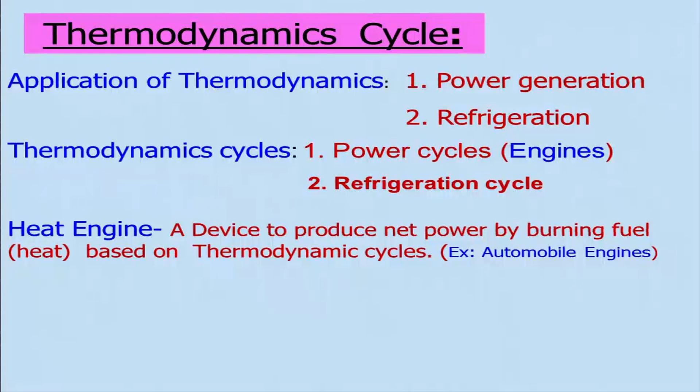Examples of these engines include automobile engines, gas turbine engines, rocket engines, and others. As I said, these are heat engines, devices to produce net power by burning fuels—it may be fossil fuel, nuclear, or similar kinds of fuels—and basically you generate heat, which acts as the driving input, and this is best operated on thermodynamic cycles.

This heat comes from combustion, that is the burning of fuel, and this combustion can be divided into two categories: one is the internal combustion engine, the other is the external combustion engine.

If you look at your automobile engine, is it an external combustion engine or internal combustion engine? Most of you might be riding your bike, which is powered by a heat engine, right? So what is that—internal combustion engine or external combustion?

What is the meaning of internal combustion engine? It is basically where the combustion, or burning of fuel, is an integral part of the engine—that's the internal part of it. In an external combustion engine, you can burn some fuel which is not an integral part of the engine, so we call that an external combustion engine.

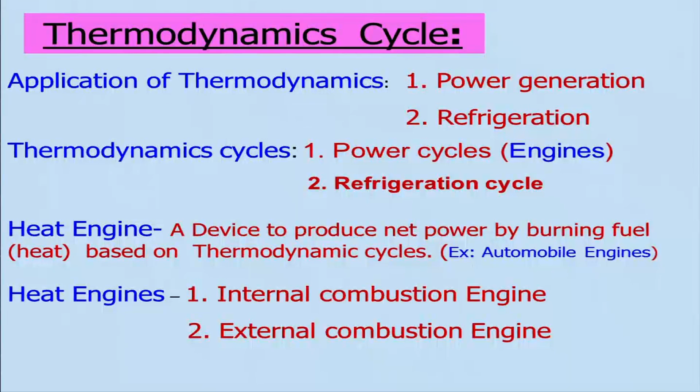If you look at the power cycle, which generates the power, it is not actually the cycle generating power, it is the system operating on the thermodynamic cycle that produces the power. Therefore, we label this cycle as a power cycle.

Power cycle can be broadly divided into two categories. One is the vapor power cycle. As the name indicates, vapor will be produced in the process - it is a liquid and then it will be converted into vapor, and again it will be converted into liquid through a condenser, and then you will get back the liquid.

In another cycle, or heat engine, there is no need to have a phase change process, like gas will be working, as in your automobile engine. We take the fuel, and of course the liquid fuel will be converted to gaseous form, but that is not the case here. You will basically be burning the fuel mixed with air, and working on that. We will be discussing the gas power cycle in detail.

Now, we will be discussing the vapor power cycle today. When you talk about this power cycle, it can be broadly categorized into two again, based on whether it is a closed cycle or an open cycle.

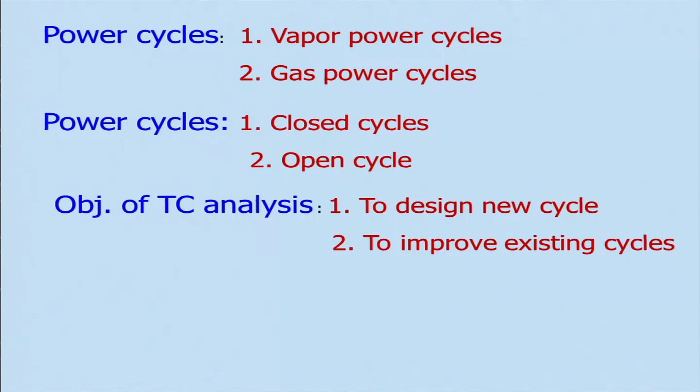Our objective is basically to analyze the thermodynamic cycle in twofold. One is to design a new cycle - suppose I am not happy with a cycle and want to improve it. Another is to improve existing cycles, because as we had seen in the last few lectures, we are interested in finding the second law efficiency to identify irreversibilities, so that we can pinpoint those things and minimize irreversibility to improve the efficiency of a system, engine, or refrigerator.

That will be helpful, and we will also gain some understanding. As I told you, the main interest in thermodynamic cycles is to determine the thermal efficiency, because that will tell you how good the cycle or the engine or refrigeration system is. We will always also need to look at other performance parameters, like the second law efficiency we saw in the last lecture, so we know to what extent we can achieve performance. Otherwise, you may think you want to achieve something, but it is not possible - so you should know the limit.

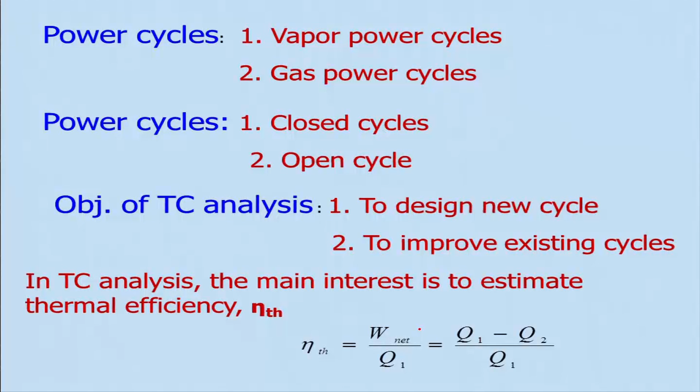Now we will be discussing vapor power cycles, and the steam power plant is operated based on that. Of course, we may think about what other fluids one can use. Steam power plants are being used profusely, not only in our country but in other places too. We depend on coal for generating power, and steam power plants are used - something around 70 to 75% of total power, maybe a little more. Earlier it was 90% of power generated by burning coal.

So there is a lot of scope for that, but what I was asking is a little different - is there any other fluid which can be used in vapor power cycles? Any idea? Of course, one has to look at the properties. Suppose except water, can we use some other fluid? What other fluids come into picture? Any idea? No idea.

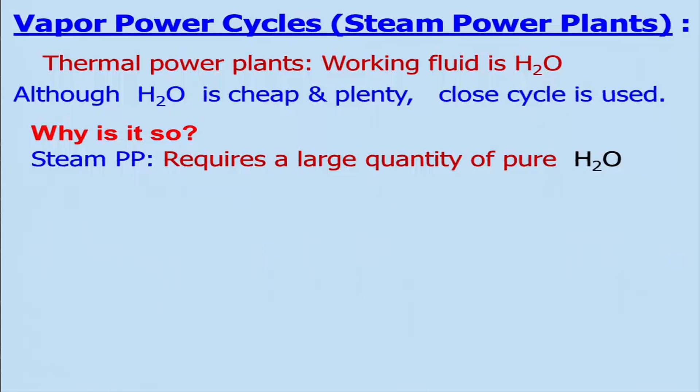But we do not do that because the steam power plant requires a large quantity of pure water. See, if you look at the water, you might be knowing that particularly the water in IIT Kanpur has a lot of solid content of minerals, right? If you boil it, you will see the scaling happening on your utensils. Did you notice that? In your room or something, you will find this.

So that scaling will be corroding the turbine blades, and it will be corroding the boilers and other components. So therefore, it is very difficult to maintain those components. And therefore, we need to use water which does not contain any solid particles or minerals which will dissolve in the water. So, therefore, that is the reason why a closed cycle is used in thermal power plants.

Otherwise, if I use purified water like that and just leave it, it will be a very costly affair. The water which will be used in this power plant will be quite pure in nature, so the cost will be very high.

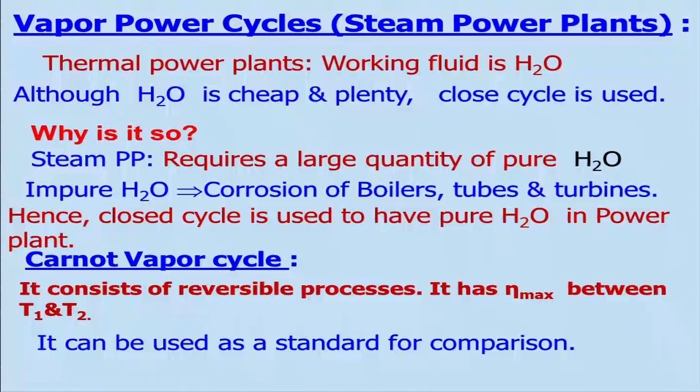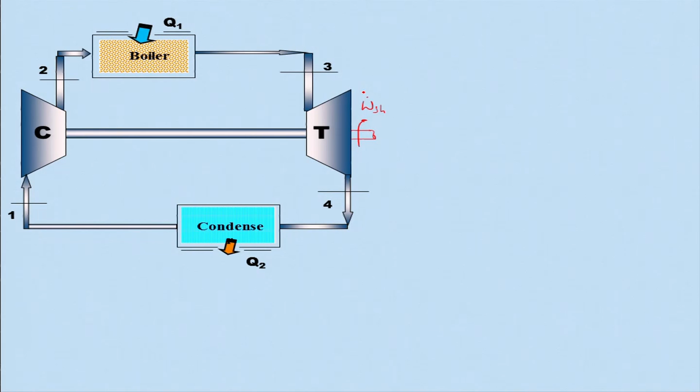Then in the condenser, when this fluid goes through it, it will be rejecting heat, let us say Q2 amount of heat, and then you will have to compress it such that it can go to the higher pressure, and then it will come back to that.

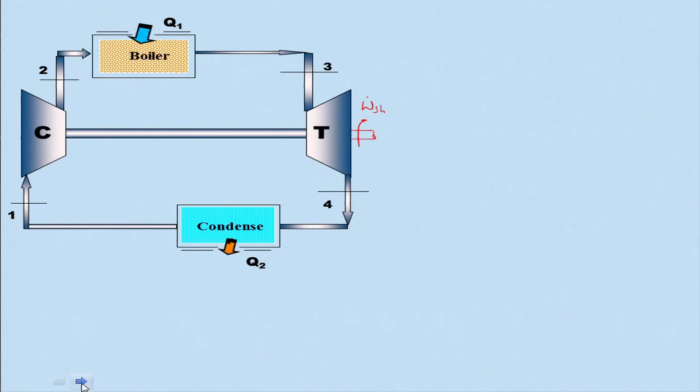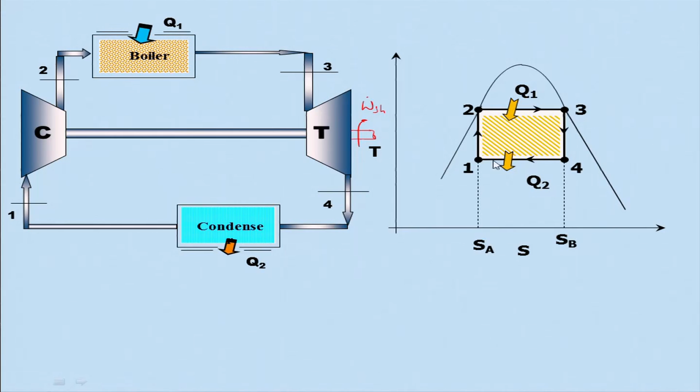So if you look at the processes: 2 to 3, a certain amount of heat is taken by the fluid from the boiler, and then it is expanded, ideally, from 3 to 4, where entropy remains constant isentropically. Then heat is rejected from 4 to 1, and 1 to 2 is your compression process. So this is the expansion process, which is isentropic, as entropy remains constant in this process. This is your compression, again isentropic. This is heat addition, 2 to 3, and heat rejection is 4 to 1, with temperature remaining constant - this is isothermal heat rejection, and heat addition is also isothermal in the Carnot cycle.

Now, let's look at what problems we will face if we use the Carnot cycle. Of course, there will not be any problem for heat addition, because if the phase change process is taking place and you keep the pressure constant, the temperature automatically will be constant. Similarly, heat rejection will not have much problem keeping the temperature constant in a practical sense, as the two phase flow is occurring.

But if you look at what the quality of the steam will be at state 4, is it quality 1, or 0, or in between? It will be in between, because of two phase flow. And for expanding the steam in a two phase flow, it is very difficult, and also it may erode the blades because two phase flow is difficult to handle.

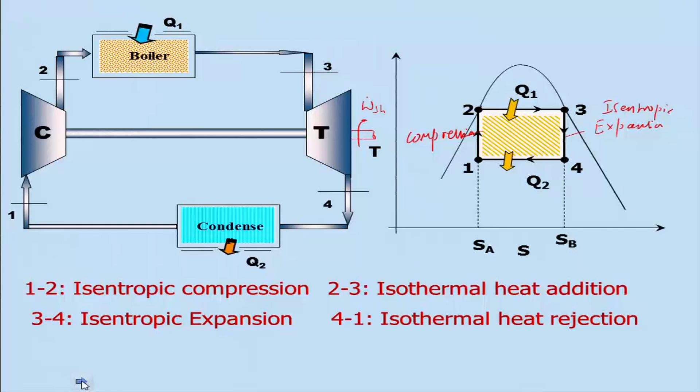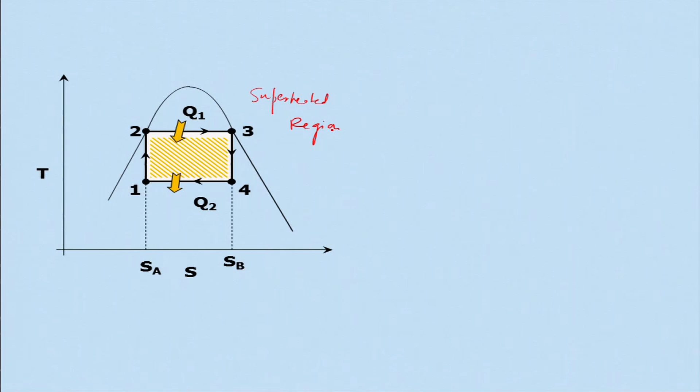Similarly, there is a problem with compression also. So, to overcome these problems, one can think of solving them. How can we solve it? We can think of managing this compression to occur in the superheated region. This is your superheated region, and then this portion is your compressed liquid.

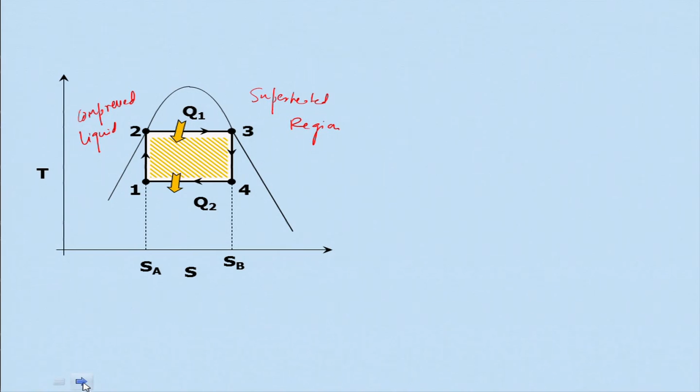So if you do that, then you are handling single phase fluid, and the problem may be solved. We can add heat here from 2 to 3 and then expand from this superheated region till the saturated vapor region, 3 to 4. And of course, 4 to 1 there is no problem, because heat rejection occurs there. It is liquid at state 1, and then you can compress the liquid very easily, single phase fluid. So that problem can be solved.

But here it is very difficult to control, for example, in the condenser when heat is being rejected between station 4 and 1, to what extent will it be rejected. I can happily reject to the saturated liquid condition, but it can stop anywhere in between. So then you cannot have control over compression to what extent, practically.

But in the modified version of this Carnot vapor cycle, you will also find a problem in the region between 2 to 3, because the pressure will not be remaining constant between state 2 to 3 in the modified Carnot cycle. This is your modified Carnot cycle.

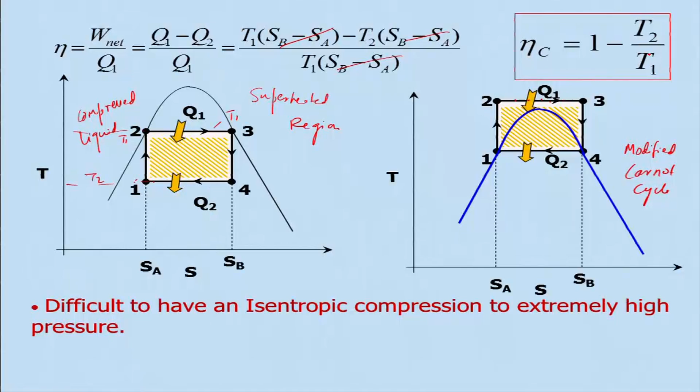We have seen that basically it is dependent on two temperatures, one is the sink temperature T2 and the other is the source temperature T1.

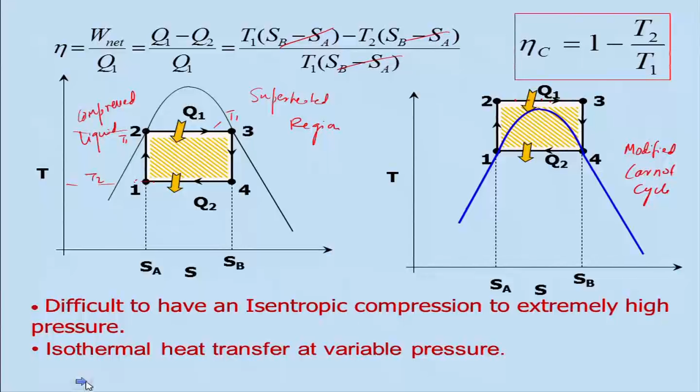So, what happened, can we solve this problem? What we will do is, instead of this compressor, we will basically replace it with a pump. Do you know the difference between a compressor and a pump? A pump generally handles liquid, like a water pump and other things.

The cycle is similar in nature: there is a boiler component, a turbine, a condenser, only instead of a compressor we are replacing with a pump. That indicates that in the condenser the liquid will come from the vapor to the saturated liquid point, meaning all the liquid, there is no vapor as such.

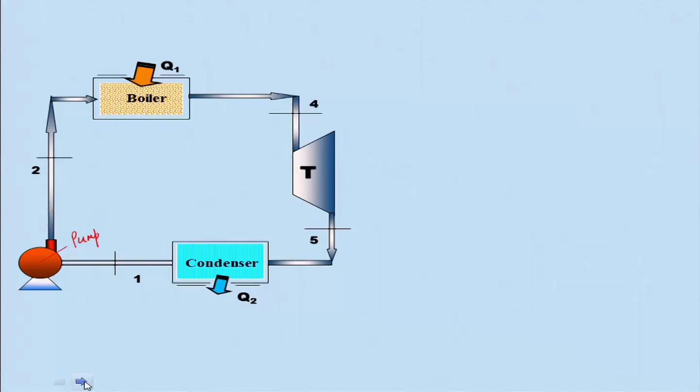This cycle is basically modified by W.J. Rankine, and that is why you call this modified cycle the Rankine cycle. So, if you look at the process, what we are doing is retaining the same heat addition from 3 to 4, that is constant pressure and also isothermal heat addition. Temperature will be remaining constant.

It is being expanded in 4 to 5, that is isentropic expansion we are considering. This is the ideal one; in actuality it will be different. Then heat is rejected from 5 to 1 till it reaches saturated liquid, only liquid. That means X in this case, X1, will be 0, quality of the steam will be 0.

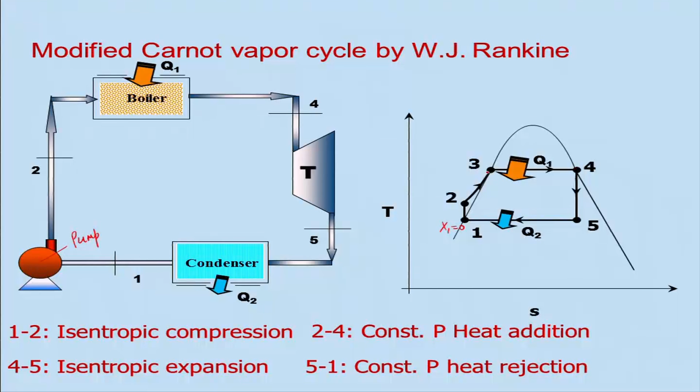It is only liquid, and then 1 to 2 is nothing but pump work. Then of course heat addition is 2 to 3 - this will be sensible heating, and 3 to 4 will be constant pressure heat addition. So this cycle is known as the Rankine cycle, devised by him, and this is basically called the ideal Rankine cycle because the processes are isentropic.

In a real situation it will not be isentropic, both for the expansion between station 4 to 5 in the turbine and from station 1 to 2 in the pump. That is not possible in reality. Therefore, we are calling it an ideal Rankine cycle.

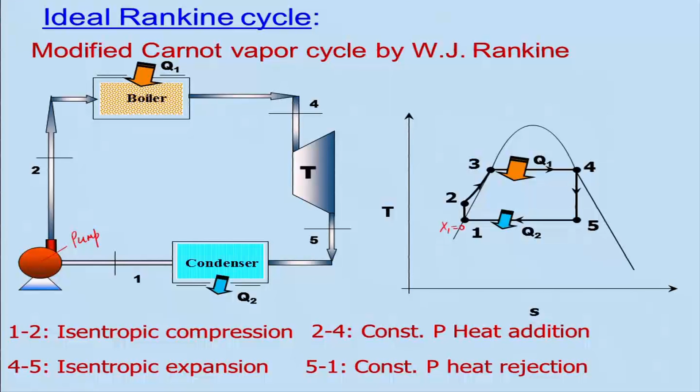Let us look at the problems we will be facing here. If you consider 4 to 5, X4 will be 1, where X is the quality of the steam, and X5 will be lower than that. If you look here, this is the saturated state where X will be 1, but here it is less than 1. That means if X is less than 1, more moisture will be there.

If more moisture is there, it will corrode the turbine blades. Generally, a quality of 0.9, or 10% moisture in the steam, is tolerable for a turbine, but more than that, a quality less than 0.9 is not advisable and generally not used.

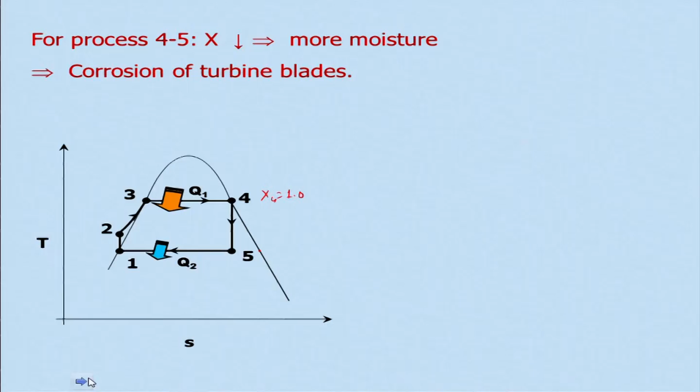So, to avoid this problem of higher moisture content, we can use superheated steam. How do we go about it? Instead of heating only up to here, I will heat it further and then expand it. That is what we will be doing.

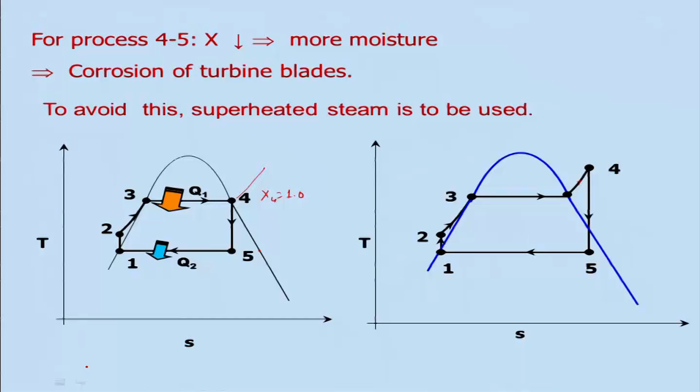So instead of stopping at saturated conditions, we superheat it to a higher temperature and then expand it, so that we get lower moisture content. This way we can overcome the problem by superheating the steam further. Therefore, what we get in modern boilers is a superheated boiler, meaning it can produce superheated steam, and this is known as the superheated Rankine cycle.

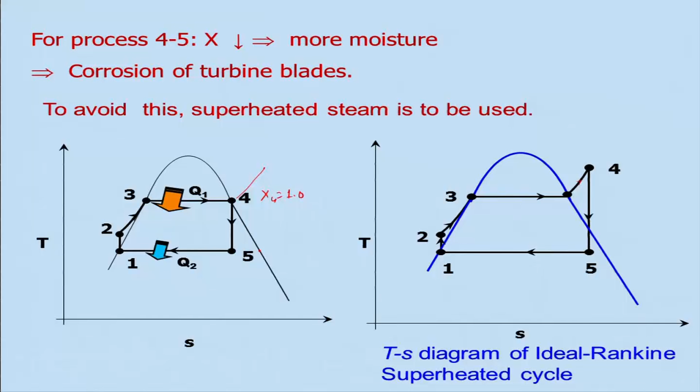And this is also an ideal process, because the processes in the turbine and the pump are isentropic, as we have considered. So we need to analyze this - we will learn how to analyze each component, and we will be applying the first law of thermodynamics to the boiler and condenser.

If you look at the boiler in this part, that is 2 to 4 is your boiler, yes or no? This is the heat added. So if you look at this, this is your Q in. So the Q in will be basically H4 minus H2, is it right?

So how have we arrived at this? We can consider the boiler as a control volume system. What assumptions are we making here? Steady state - we are making the assumption of steady state, and change in kinetic energy and potential energy is 0. There is no shaft work, shaft work is 0. So then we land in getting Q in is equal to H4 minus H2.

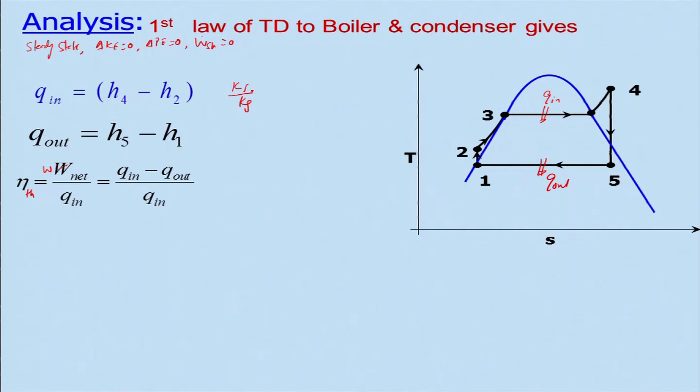And the thermal efficiency will be Q in minus Q out divided by Q in. And what is Q in? We have already seen H4 minus H2, and Q out is H5 minus H1, divided by H4 minus H2, that is your Q in.

And the net work done will be basically - the work done here is WT, and this work which is going out, you are supplying it, this is WP, pump work, and this is turbine. So H4 minus H5, that is the change in enthalpy, minus H2 minus H1, the change in enthalpy in the pump. That is the net work which the power plant will be producing.

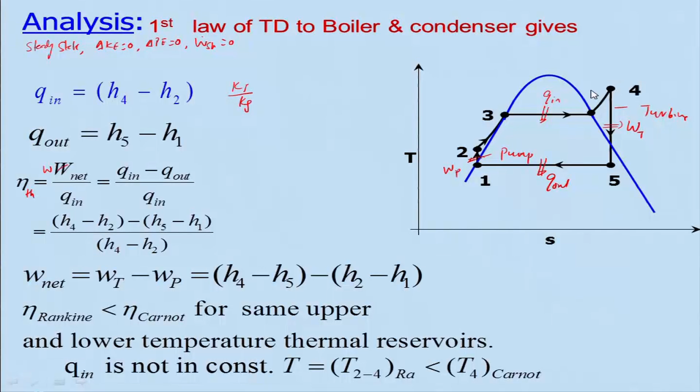And if you look at it, the Rankine cycle efficiency is less than the Carnot cycle efficiency for the same source and sink temperature. Why is it so? Because if you look at this temperature, T4 and T2, there are a lot of changes in the temperature, it is not remaining constant. Whereas the T4 will remain constant in case of your Carnot engine.

Are you getting it? So therefore, if I draw that, it will be something here, this region. If I look at the Carnot cycle, let me just draw it, maybe it will help you visualize. So that will be my Carnot cycle - it will be from here to there and then that. So therefore the temperature here, T4 for Carnot, and this you can consider as T1, temperature T1, for the Carnot. Therefore the efficiency of the Rankine cycle will be lower than the Carnot cycle.

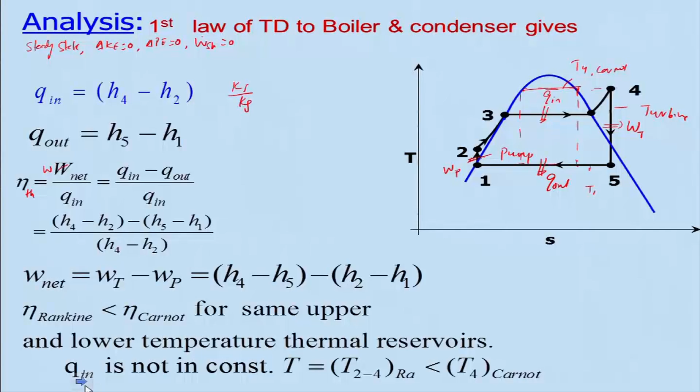So we will take an example to find out how we can work on that. This example is about a thermal power plant operated on an ideal Rankine cycle, with a steam mass flow rate of 10 kg per second. Water is fed to the boiler at 50 bar, which is quite a bit of pressure, and leaves the condenser as saturated liquid at 1 bar, 1 atmosphere pressure.

So, these are the cycles being used for this analysis. In the ideal case, 1 to 2 is the pump work, this is your pump, and 4 to 5 is your turbine expansion. This is your Q in and this is your Q out, so 2 to 4 is your boiler and 5 to 1-2 is your condenser.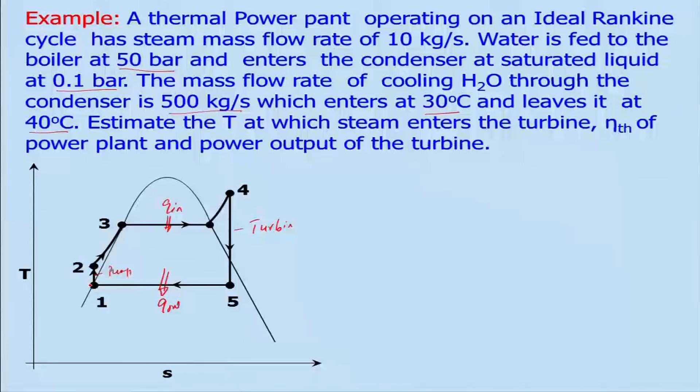So what are the things given? For the condenser, the cooling flow rate is 500 kg per second, and the mass flow rate of the steam or water in the closed cycle is 10 kg per second. We know that P2 equals P3 equals P4, because this is the constant pressure line at 50 bar, and P1 equals P5 equals 0.1 bar.

And the coolant inlet temperature is 30 degree Celsius and coolant exit temperature is 40 degree Celsius for the condenser. These two are for condenser.

So we will have to find out T4, and we will have to find out also the thermal efficiency and how much work is produced by the turbine. Efficiency is basically W net divided by Q in, and that equals H4 minus H5, this is your turbine work, minus H2 minus H1, that is your pump work, divided by the heat input to the boiler, that is H4 minus H2.

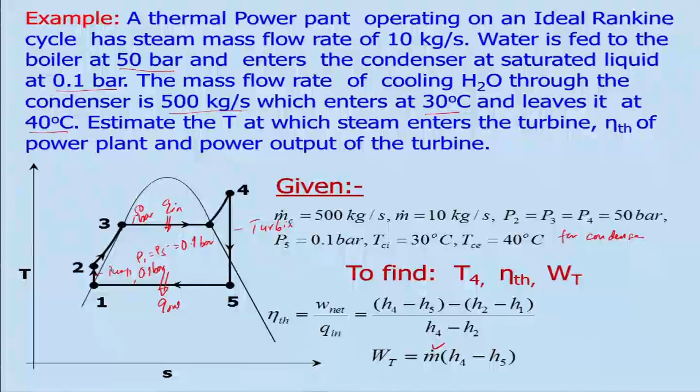I can find it, because we have given this temperature 30 degree Celsius and 40 degree Celsius, and from the steam table for water at 30 degree Celsius we can find that HF is 125 kilojoule per kg, and for water at 40 degree Celsius we get HF 167.45 kilojoule per kg from the saturated steam table.

And we have given that Q dot C, the coolant used for the condenser, is 500 kg per second, and multiplying by HF at 40 degree Celsius minus HF at 30 degree Celsius, I get this amount of heat, that is kilojoule per second. This is kilojoule per kg and this is kg per second, so I am getting this much power or heat extracted in the condenser.

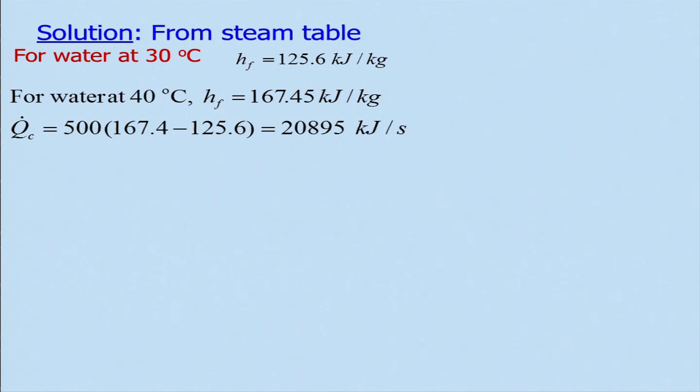So the energy rejected by unit mass of working fluid, what would it be? Q out, what would it be? This will be Q dot C divided by the mass flow rate of the steam, which is 10 kg per second. So that is nothing but 20,895 divided by mass flow rate of steam, that gives me 2089.5.

Right, per kilo, what will be the unit? This will be kilojoule per kg, yes or no? Because this is kilojoule per second and this is kg per second, 10, this unit will be kilojoule per second and this is kg per second, so the second will cancel out, you will get kilojoule per kg.

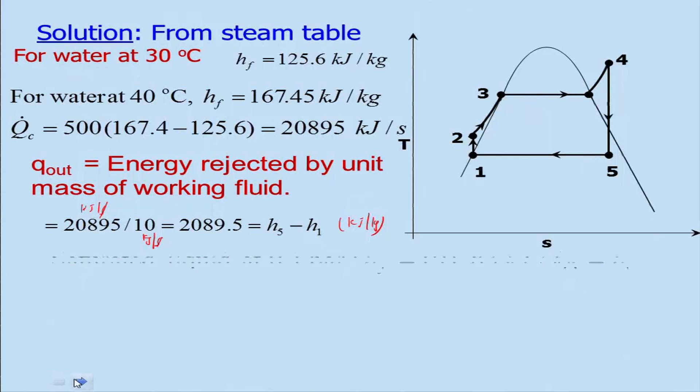And that equals H5 minus H1. So we can get these properties, H1 very easily from the saturated steam table, and H5 we know from this. As I told, the saturated liquid at 0.1 bar, from the steam table, HF equals 191.83 kilojoule per kg, and that is nothing but H1. So if I know H1 and if I know this, then I can get very easily the H5, and we will do that.

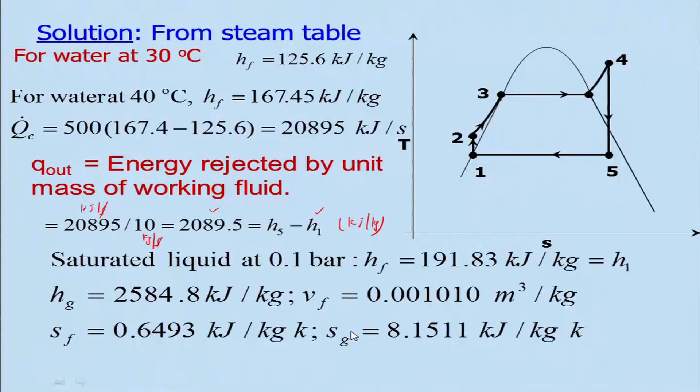And of course, we need to know these properties like Hg, Vf, Sf, Sg, all those things we should get from the data. So, as I told earlier, we know H5 minus H1, that is equal to 2089.5 kilojoule per kg, and H1 we already got from the steam table. So, this is known, and we can find out H5.

So H5 is equal to 2283.3 kilojoule per kg. So now I know what is H5 here, at this point. And whether it is possible to calculate that, we will see.

By knowing this H5, I can calculate what will be X5, X is your quality, is it not? Why do I need to find out quality here? Is it required? Because I do not know this point, right, I need to find out this.

In general problems, what could have been given is the pressure, which is already given, and for the superheated steam you have not given the temperature. So if temperature is given, then this point is your superheated steam.

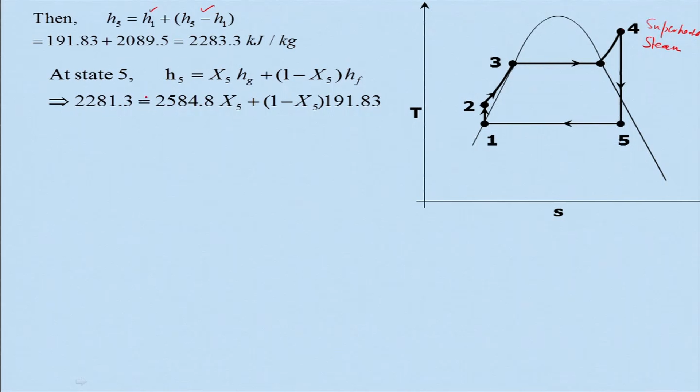So therefore you need to find out that. H5 is known, Hg is already from the steam table, and Hf is known from the steam table, and you can substitute these values and get X5 as 0.8732, which you can approximate as 0.87.

And then I will have to find out entropy. I can find out S5, entropy is 7.19 kilojoule per kg Kelvin, because I know Sf and Sg, I know X5, and I substitute those values to get that.

As I told, we are very much interested to find out this point, because the entropy will be remaining same, that is S5 is equal to S4, because this is isentropic expansion. So therefore S4 is equal to S5, and we will be using that condition.

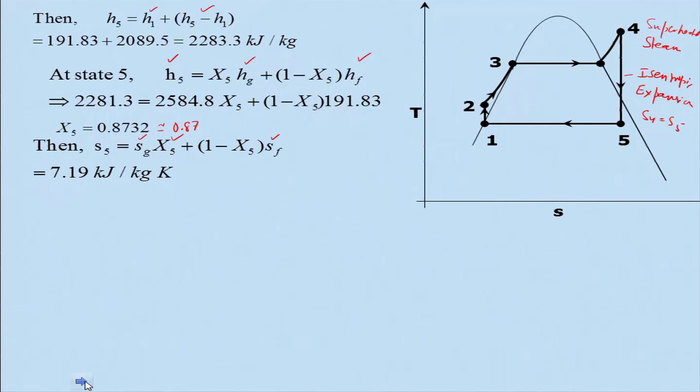Are you getting this? So therefore we are now very sure that this is a superheated steam. In the problem it is not given that it will be superheated, am I right? Yes or no? It is not given as superheated steam.

But however, now we will find that S5 is greater than Sg. Therefore, it is superheated steam.

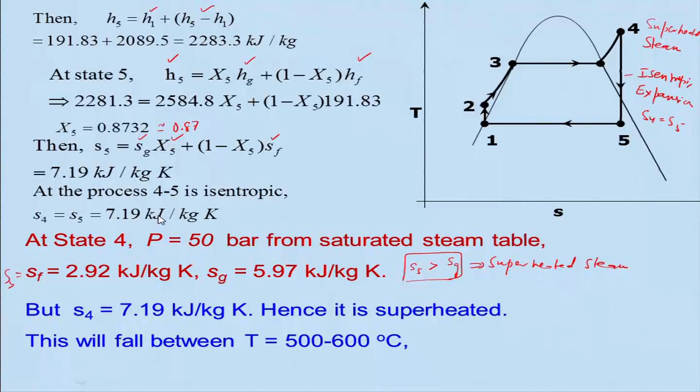So this will fall between, then you will have to find out temperature. What temperature? Temperature is between 500 to 600 degrees Celsius. You will find this entropy is coming as 7.19 kilojoule per kg, and you will have to do an interpolation to get that value.

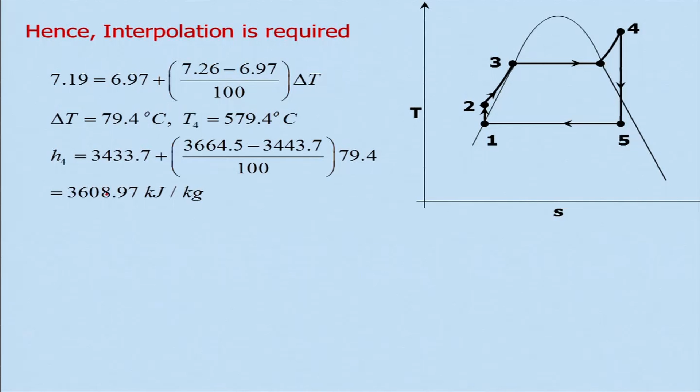By interpolation, for 500 to 600 degree Celsius, you find the entropy at each, and you find delta T is basically 79.4 degrees Celsius, so T4 will be 579.4 degrees Celsius. By knowing this, one can calculate H4 in a similar manner, because you know the enthalpy at two different temperatures, 500 and 600 degrees Celsius. Therefore, you get H4 as 3608.97 kilojoule per kg.

And of course, the work done in the pump is H2 minus H1, which is nothing but V into delta P, where V is your specific volume.

Volume at what point? At state 1, right. This is basically V1 into delta P, and how much will it be? This is what delta P will be? Delta P will be, this is 0.1 bar, and this is your 50 bar.

So that will give me the work done on the pump, or work input into the pump. So if you look at the specific volume, it is very low, and this V1 corresponds to the saturated liquid conditions, which you can get as Vf1 from the steam table corresponding to 0.1 bar. So you can note one thing, this is a very small value, 5.04 kilojoule per kg, right.

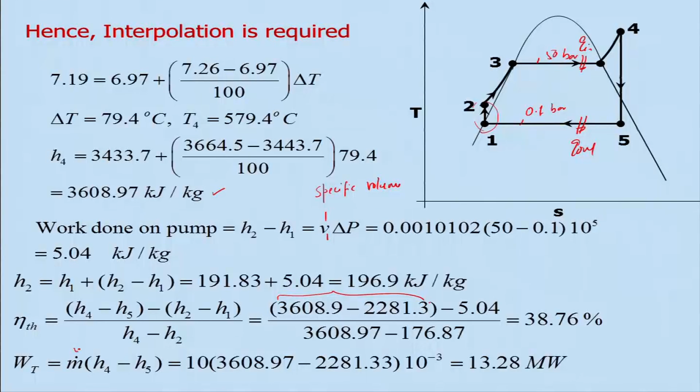So the net work by the turbine will be m dot into H4 minus H5, and that happens to be 13.28 megawatt, and of course this is known, like 10 kg per second.

So if you look at the back work ratio which we had defined, that means how much power is being consumed by the pump as compared to the power produced by the turbine, Br is equal to Wp by Wt, and if you put that in, it is very small. We will see, whenever we look at some other power plant, that it is a very sizable amount. That is the beauty of the steam power plant, that work input to the pump is negligibly small.

So if the steam is produced from a constant thermal reservoir at 600 degrees Celsius, right, we need to find out the second law of efficiency, and the second law of efficiency is basically the net work done divided by the reversible work. We have already seen this Q in into 1 minus Th by TL.

Actually, it should be the other way around, it will be TL by Th. So that is basically Q in into 1 minus TL by Th, and this is nothing but your Carnot efficiency, if you look at it that way. And when you substitute that, you will get 59.1% as the second law of efficiency.

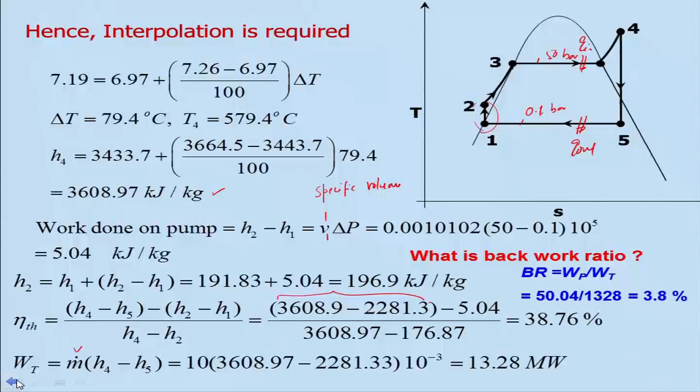What was the first law of efficiency? Can you just look at your notes and tell me? It will be something around 38%, right? 38.76% is the first law of efficiency, and the second law of efficiency is basically 59.1%.

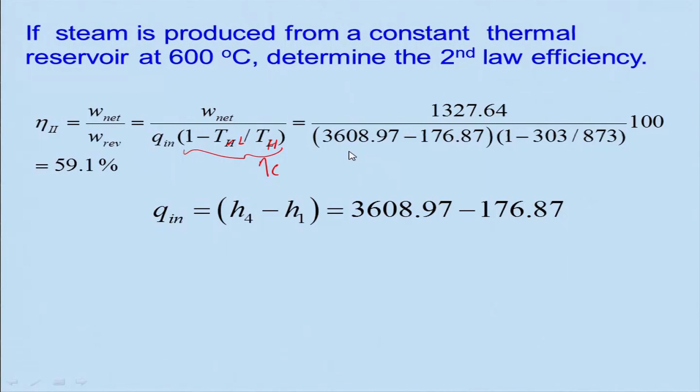That means there is a lot of scope to improve the efficiency of this power plant. Of course, we are considering ideal conditions, but still there is scope for improving from 38.76 to 59.1. So, of course, if you look at this Q in, one can find H4 minus H1, and that we have already done, and then you can find the efficiency. So we will stop over here, and in the next lecture we will discuss other aspects of the Rankine cycle.